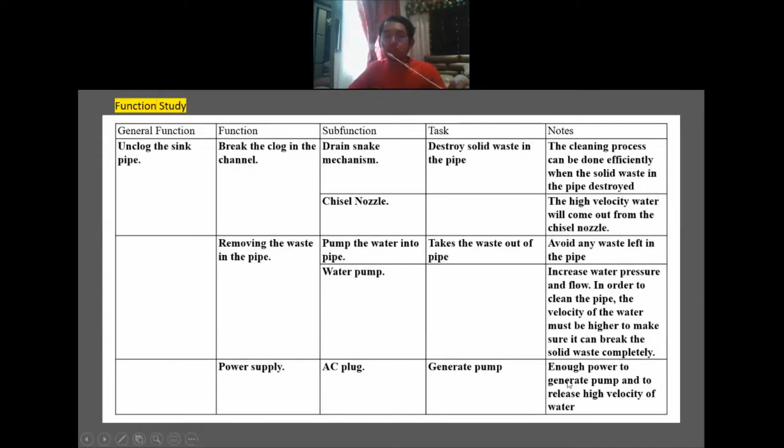For removing the waste in the pipe, the pump is used to pump water into the pipe to take the waste out and avoid any waste left in the pipe. The water pump increases water pressure and flow. In order to clean the pipe, the velocity of the water must be higher to make sure it can break the solid waste completely. For the power supply, we choose the AC plug to generate the pump, which is enough power to generate the pump and release high velocity water.

For the function diagram of our product: the pump is supplied with water, and electric supply is supplied to the pump. Then the pump starts to work, releasing high pressure and high velocity water through the chisel nozzle, which is used to break the solid waste in the pipe. The chisel nozzle plus the drain snake are pushed into the pipe, so it can remove all the blockage until the pipe is clean.

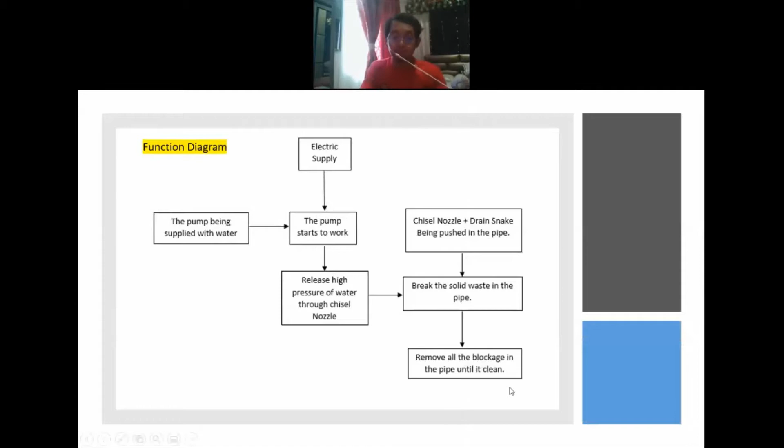Today I will present about the concept generation for our main product. My team and I use a morphological chart to select the best option that will be used to make the main product. We have a few functions that will be used for our main product.

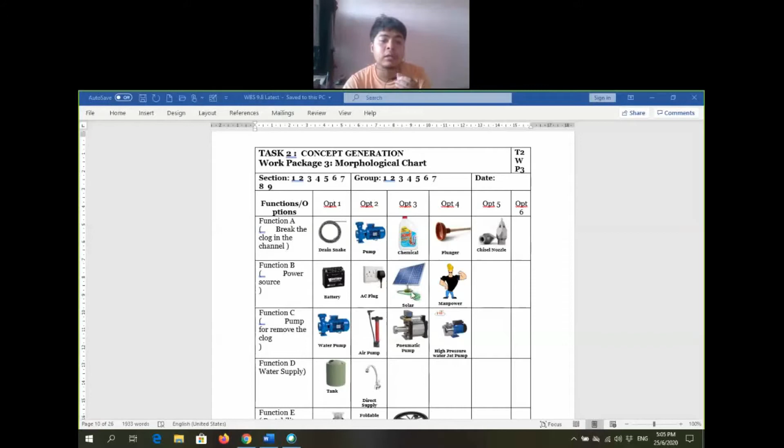We have 5 options to break the clog in the channel: drain snake, pump, chemical, plunger, and chisel nozzle. For the power source, we have 4 options: battery, AC plug, solar, and manpower. For the type of pump used to remove the clog in the channel, we have 4 options: water pump, air pump, pneumatic pump, and high pressure water jet pump.

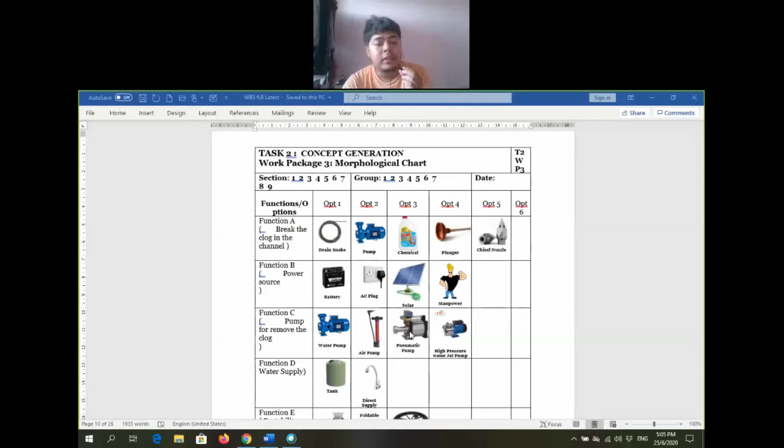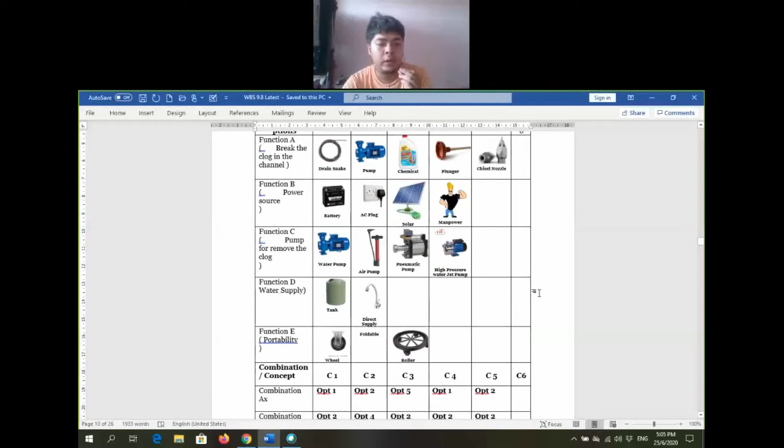For the water supply, we have 2 options: tank and direct supply. For the portability, we have 3 options: wheel, foldable, and roller. Our team has 5 final products and needs to make an analysis to choose the best option for the main product.

My name is Dzahirul and I will explain my rough sketches. First, the water we get is directly from the water source and the power we use is AC supply. This is the body of my sketch. It has a drain snake used to break the clog part and the pump hose to flow the water directly from the water source, and there's a pump inside this.

Then we have the pump hose to flow the water that has been pumped, so the water flows into the drain at high pressure. It has wheels and handles so it can be moved around easily. Thank you.

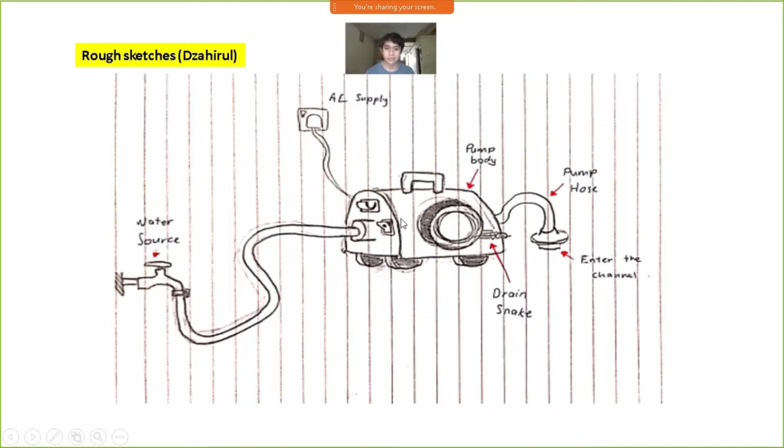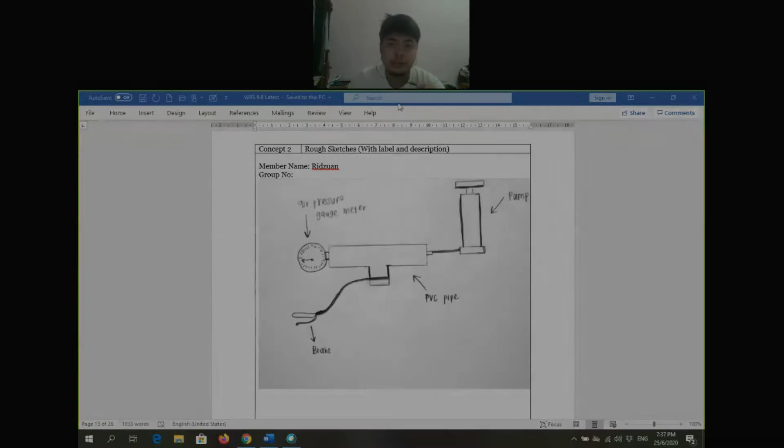Thank you. My name is Muhammad Irfan bin Hamran. This is my drawing for concept 4. The shape of my design is box shape. It is compact and portable. Below it, it has a wheel for movement around easily.

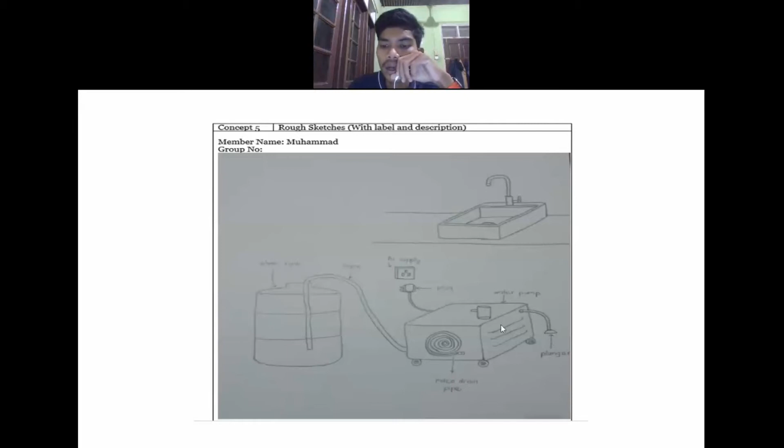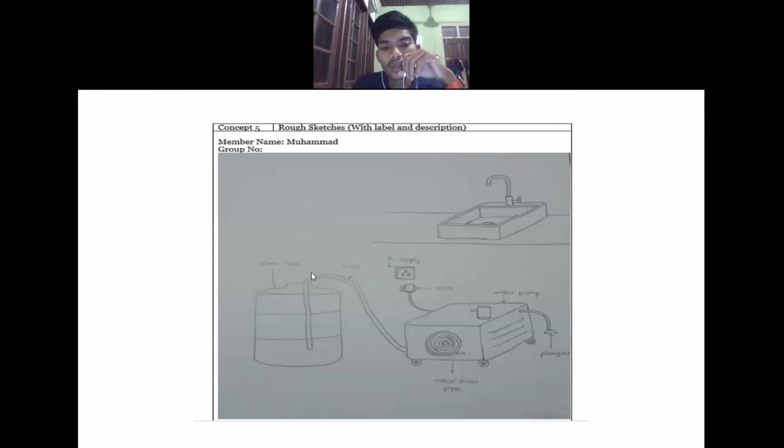For the water pump pull, the waste goes through a condense pipe. For the supply, I use the AC supply. I use the water for the water tank and the pump. The pump pulls the water into the hose and pushes to release it. That's all, thank you.

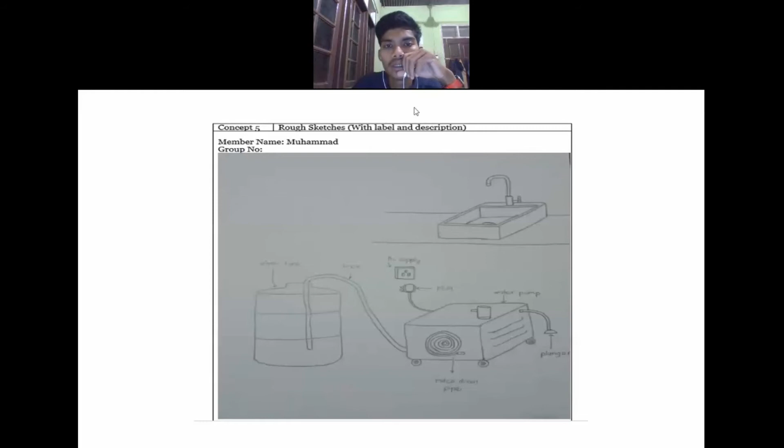For concept generation, the first step is the screening method using absolute criteria. From the five concepts: the first concept is from Zahirul, second concept is from Ridzuan, third concept is from Hazim, fourth concept is from Irfan, and fifth concept is from Muhammad. We will filter all the concepts and choose which one is most suitable for our product.

For the first filter, we will check whether the concept is not feasible, conditional, or feasible. Not feasible means it is not possible to be met. Conditional means it can be met but only under certain conditions. Feasible means it can possibly be met.

For the first filter, concept 1 and concept 3 are feasible, meaning they can be met. Concept 2, 4, and 5 are conditional, meaning they have certain problems which require them to be met only under certain circumstances.

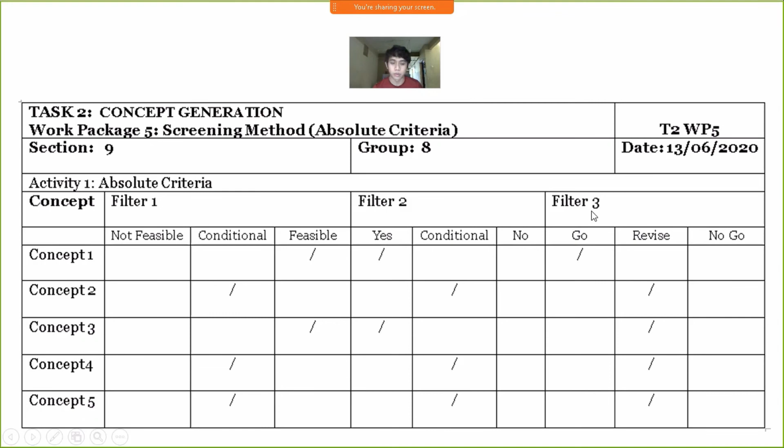For filter 3, we will follow concept 1, made by Zahirul, but we will revise the other concepts. We will go with concept 1, but apply some ideas from concept 2, concept 3, concept 4, and concept 5 into concept 1, making it a better product. Thank you.

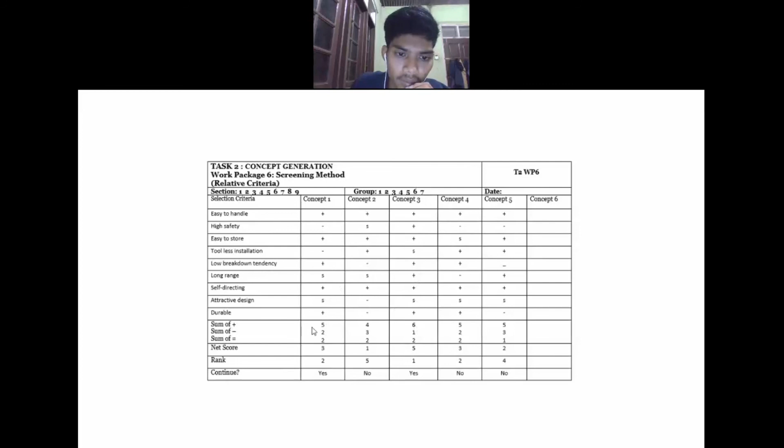For concept one, we continue to study concept one, and concept three is also continued to be studied. We got the highest rank for sum of plus: 6 for concept 3, and for concept 1 the sum of plus is 5.

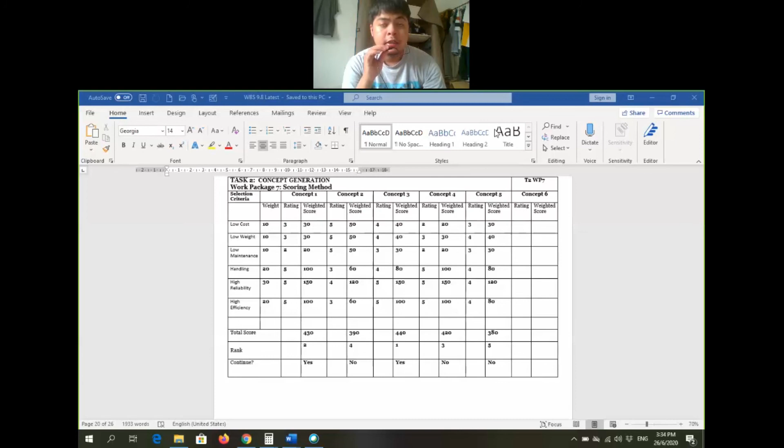After our team's analysis, scoring each option according to the criteria, we concluded that concept 3 is the best option for the main product. For cost, this concept scored 4 out of 5. For weight, it scored 4 out of 5. For maintenance, it scored 3 out of 5. For handling, it scored 4 out of 5. Reliability scored 5 out of 5, and lastly, efficiency scored 5 out of 5. This option took first place for the total score.